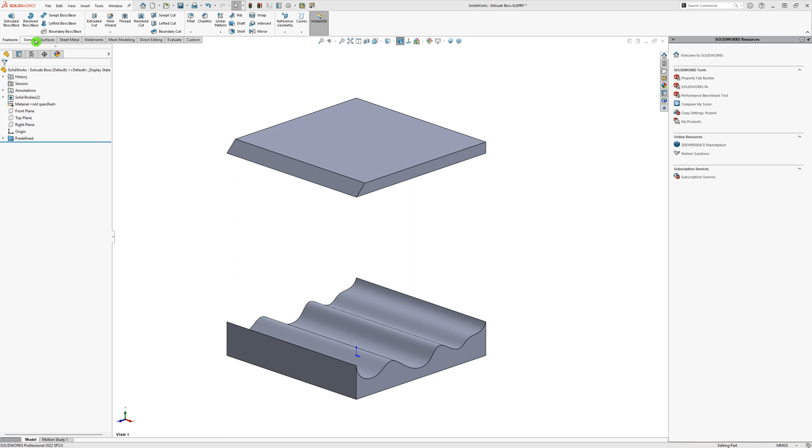To use this feature we first need to create a sketch. In this case we want to add a cylindrical shape on top of the top plate which is already there.

When the sketch is complete we start the Extrude Boss feature from the Features tab at the Command Manager. In the Feature Manager, left in the screen, a new property screen pops up with a bunch of settings for this feature. We will walk through them from top to bottom.

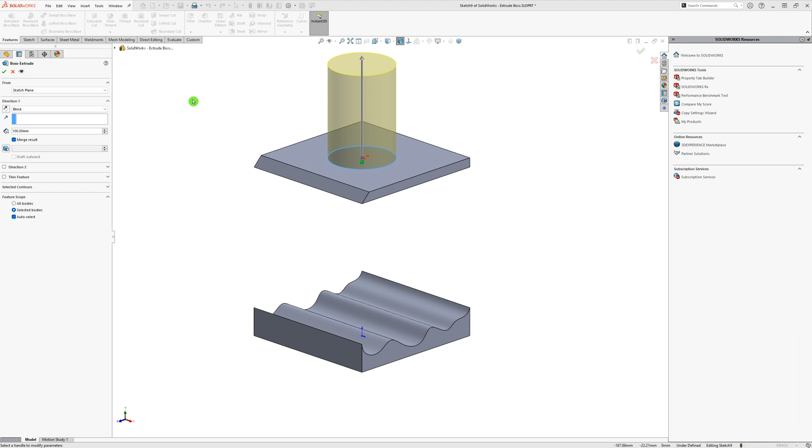In the first section, we need to specify from where the extrude must be applied. By default this is from the same point as where the sketch is drawn, as shown in the preview. When the option surface is selected you should select a face or plane from where the extrude should start. With the option vertex, you should select a point, and with the last option offset, a distance must be entered which defines the distance between the sketch plane and the start of the extrude from there.

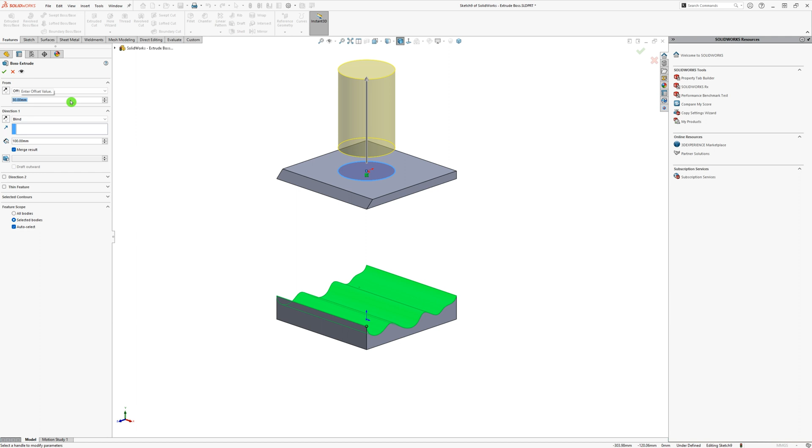Next up, in the section Direction 1, we have to specify the length of the Extrude Boss. For this there are also quite a few options: blind, through all, up to vertex, up to surface, offset from surface, up to body, and mid-plane. We will cover them one by one.

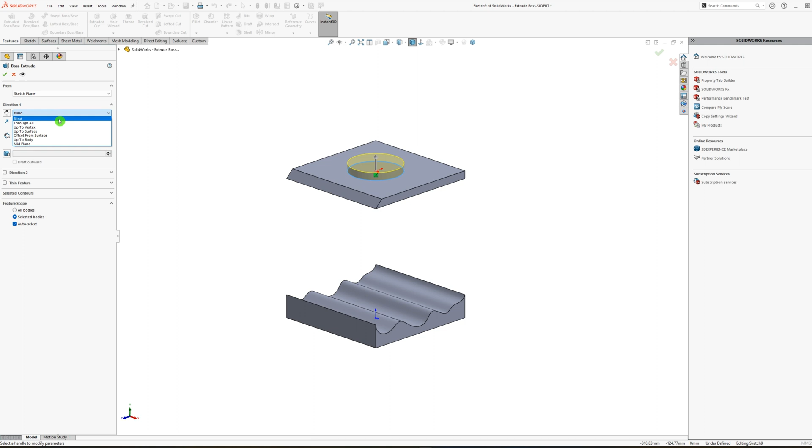Blind: here you need to enter a dimension from the start to the end of the extrude in the input box below.

Through all: the extrude will go all the way from the start up to the last geometry in that direction.

Up to vertex: you need to select a point from the geometry where the extrude should end.

Up to surface: you need to select a surface where the extrude should end.

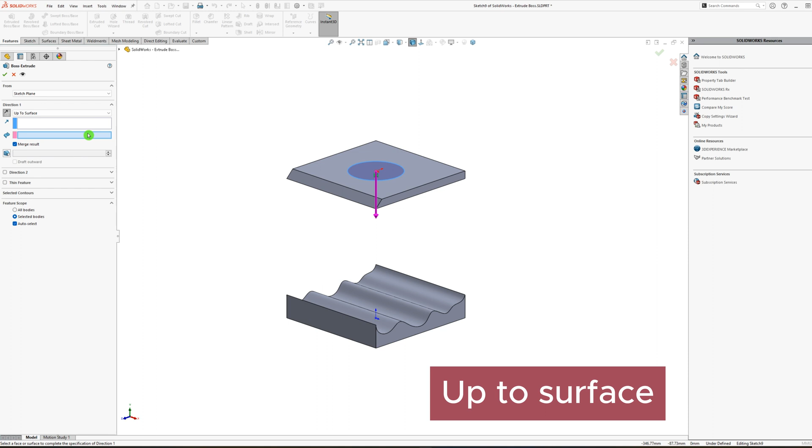Offset from surface: you need to select a surface and then give a dimension to specify the distance from the selected surface.

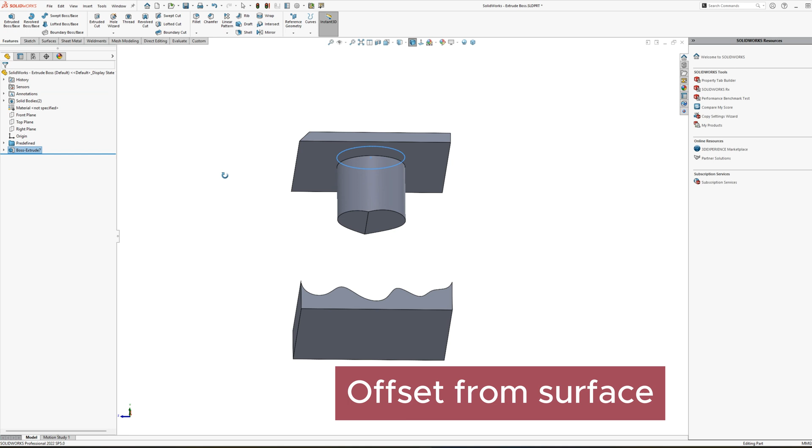Up to body: you need to select a body and the extrude will end at the first contact point of the selected body.

Mid-plane: this works the same as the blind option, but now the extrude goes equally in both directions. Note that the entered length is the total length of the extrude.

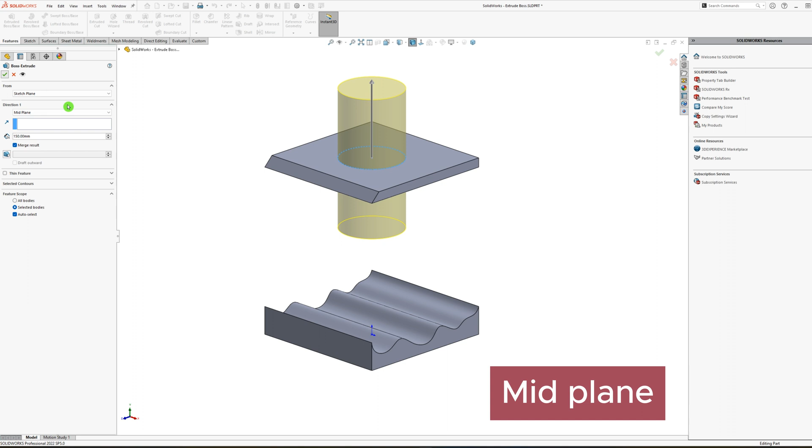Now we have covered all the options for the length, let's look at the other options. Next to the option menu for Direction 1 is a button with two arrows. This button defines the direction and can be toggled to apply the extrude in the opposite direction.

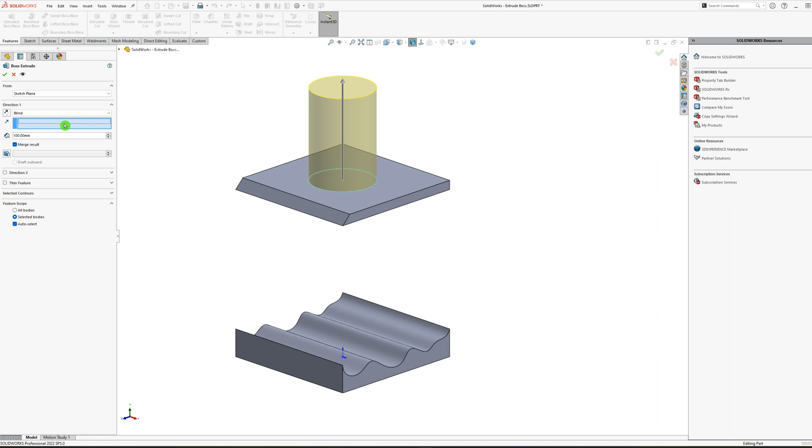Under the option drop-down is a selection box. When you click on this, you must select a surface that specifies the direction, normal to the sketch profile, of the extrude.

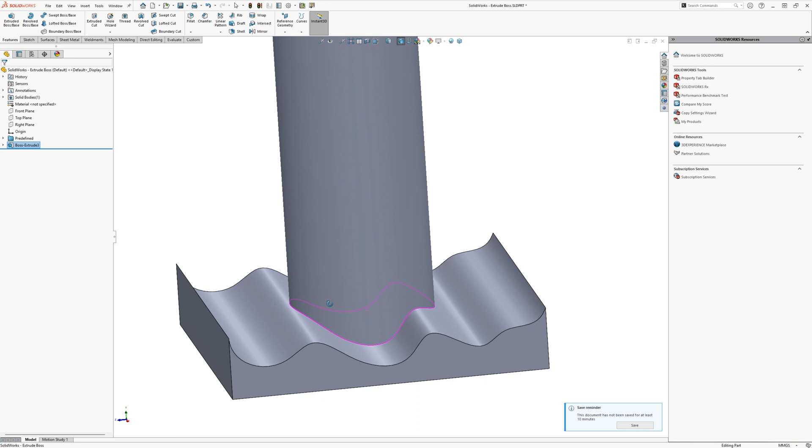In the middle is a little checkbox. This checkbox determines whether the extrude will be merged with other touching geometry or not. When the extrude will not be merged, it will be a body on its own. If there is more than one body, we call it a multi-body part. You will need this with some other features, where the geometry may not be merged, or the other way around.

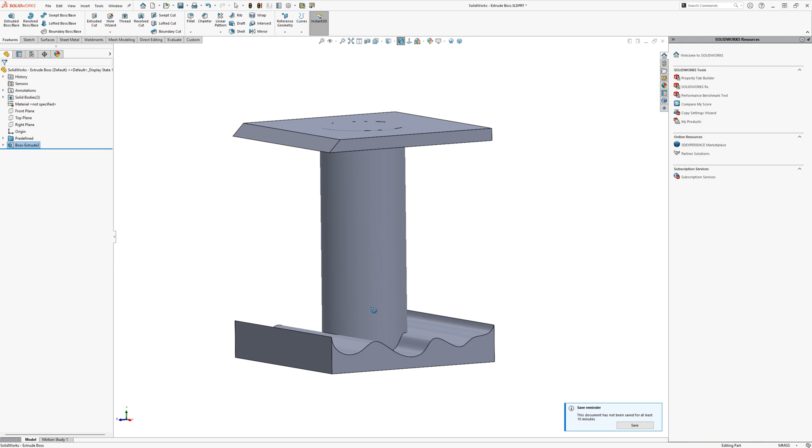Right underneath the Merge checkbox is a little icon where you can optionally add a draft to the extrude. In other words, to apply a consecutive angle from start to end. When you toggle this on, an angle dimension must be filled in. At last you can click the checkbox Draft Outward if the angle should be small at the start and bigger at the end.

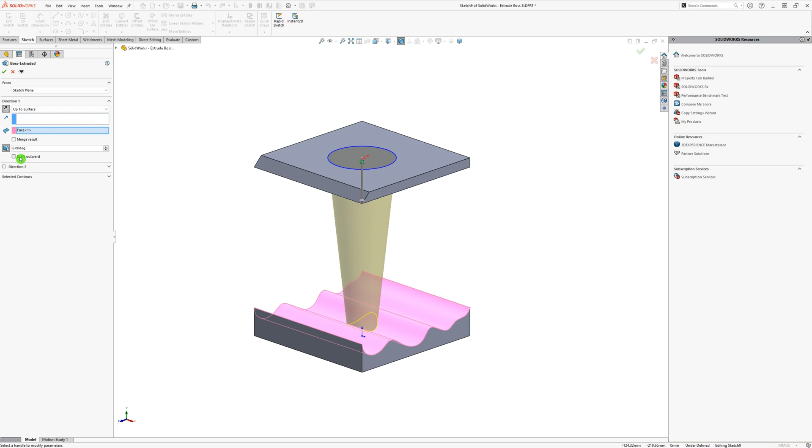The following section in the Property Manager of the Extrude Boss is Direction 2. By default this menu is collapsed and you must click the little arrow to access it and click the checkbox to activate it. This section is available when mid-plane is not chosen for the Direction 1 option. It works exactly the same as the previous section, only the extrude will go in the opposite direction.

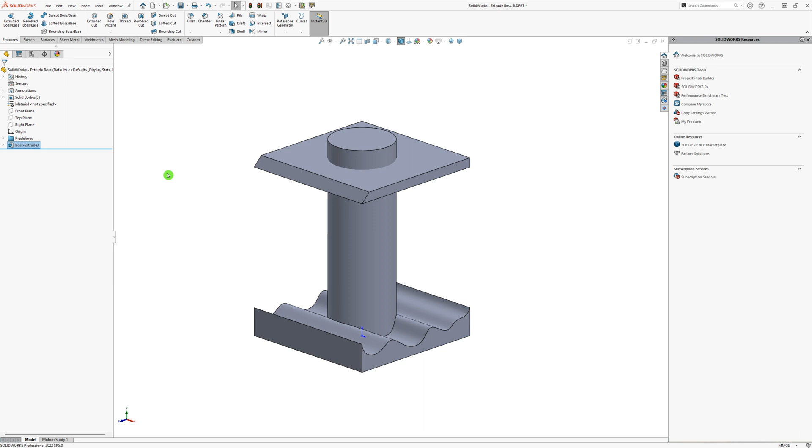Now you know everything about where the Extrude Boss should start and how to specify the length. This was already a lot of information with this relatively simple feature, but there is still more to discover. Let's move on.

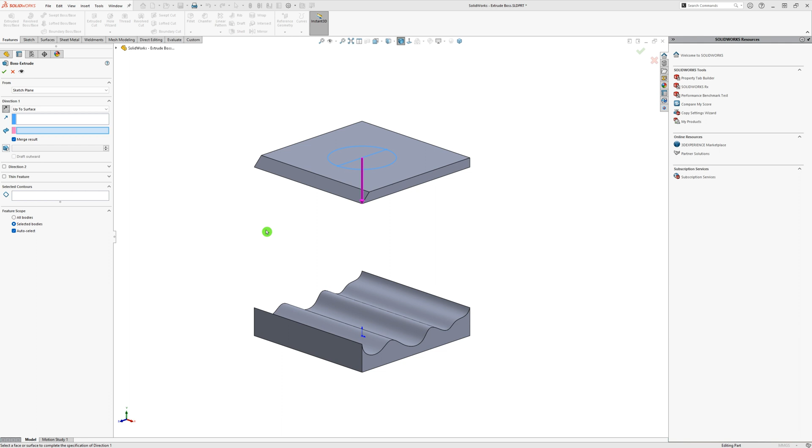The Selected Contours section is in most cases filled in by SolidWorks automatically. In certain cases you need to help SolidWorks a bit. Here we have an example where I have modified the sketch. As shown, there are now two areas in this sketch, and SolidWorks has stopped showing a preview of the extrude. Because of the multiple areas in the sketch, we need to tell SolidWorks which area must be used for the Extrude Boss. This can be done by clicking the selection box in the Selected Contours section and then selecting the area that should be used. The preview is restored instantly and we are all good.

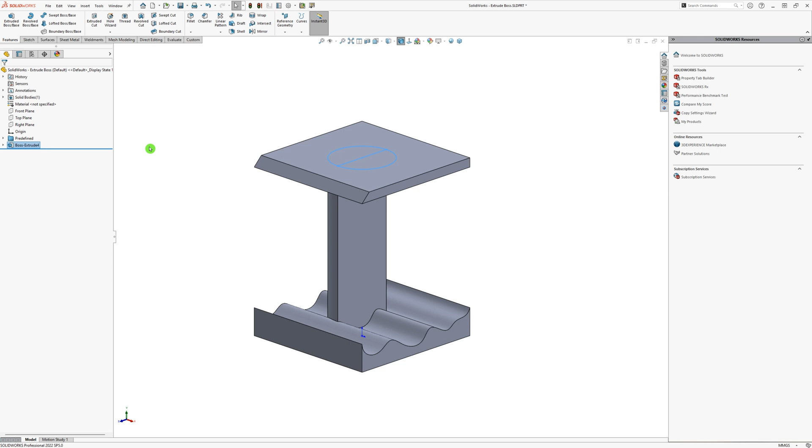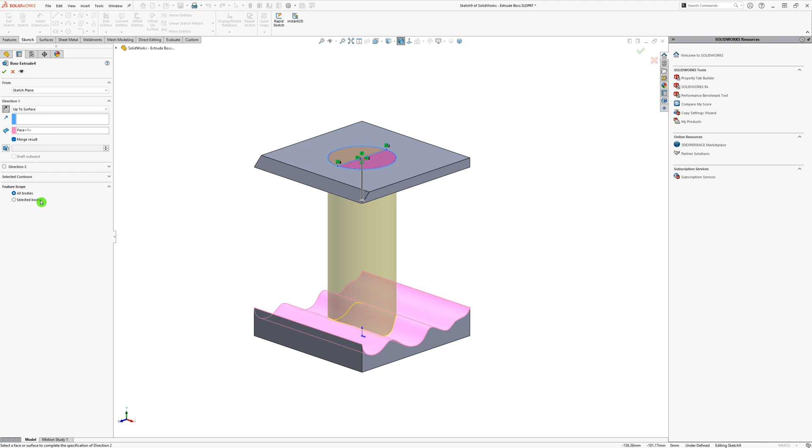The last section in the Extrude Boss properties is the Feature Scope. This is only available when the Merge checkbox is selected. By default, all the touching geometry will be merged. When the option Selected Bodies is chosen and Auto Select is unchecked, a new selection box pops up. With this selection box active, click on the bodies of the model which should merge with this Extrude Boss. The bodies that are not included in the selection will not be merged.